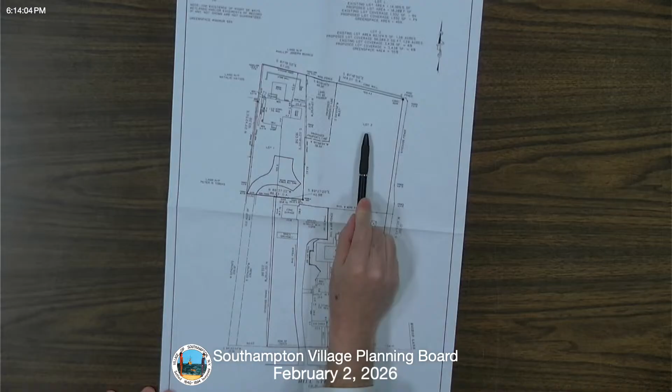Okay, yeah. 2 is on Hill Street, and 1 is at the back. Lot 2 is the larger lot to the east, and Lot 1 is the smaller lot to the west. Can you point to that again? Because we just finally got it. Sure. Lot 2 is this larger lot, actually comes all the way down here. Lot 1 is this small lot up here, it has a right-of-way over Lot 2. But this is the smaller lot, which will result in a more conforming lot once the shaded area here is transferred through this lot line modification from Lot 2 to Lot 1. Got it.

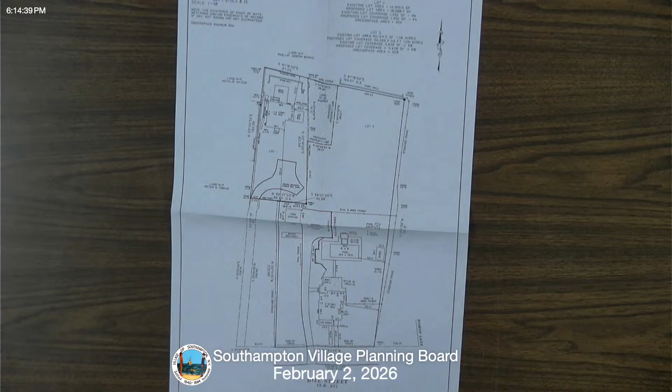And you don't need any variances. No, we are increasing conformity, so I don't think we would need variances. Alex, Lisa, any comments on this? Are you able to tell from the survey the approximate depth of that lot number 2? It's a little bit hard to read on my copy. The depth of Lot 2? Yeah. Do you mean the length of it, the distance from the street? The depth from Hill Street to the rear, the deepest part of the property line.

So the lot is 380 feet from Hill Street. And then is it Lot 2 or Lot 1 you're curious about? I think it's labeled as Lot 2. Okay, so the depth of this from Hill Street to the rear line is a total of 380 linear feet. Okay, understood. I think that there was a question about the zoning ordinance. The R40 district extends 400 feet from Hill Street at this location. So we're sure both of these are in the R20? These are in the R20. Sorry, R40 on Hill Street.

This is the confusion I have on this, because last time we looked at this, I thought this was split between R20 and R40, and that caused some of the problems. We understood it to be in the R20. If it's the R40, it doesn't actually change the calculus. One becomes more conforming, and one is still conforming as a result. Yeah, I believe all of the properties fronting on Hill Street are R40. I'll confirm that. It'd be great just to correct that for the record. I'll correct that, but again, it doesn't change the analysis. The resulting lots would be, one would be more conforming, and one would maintain its conformity.

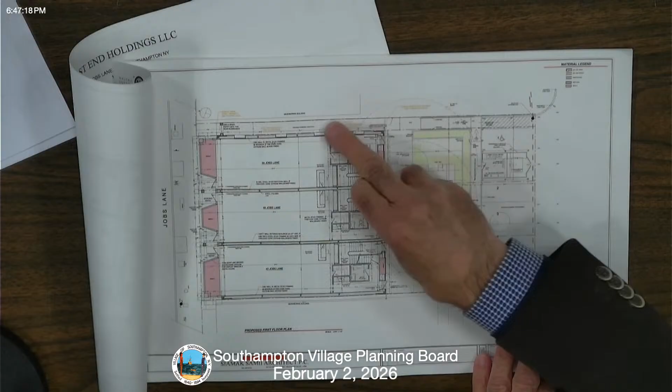Okay, good. So right there is the handicap parking, and the offloading of the handicap right there, 5 feet. That's on the same line as the ramp, which is right where my finger is. That's the ramp. It travels downwards towards the elevation of the plaza, and then you enter the plaza elevation and the walkway on the side all the way to Jobs Lane. And from this plaza, you have access both to the retail stores on the ground floor and separate entrances for the offices upstairs.

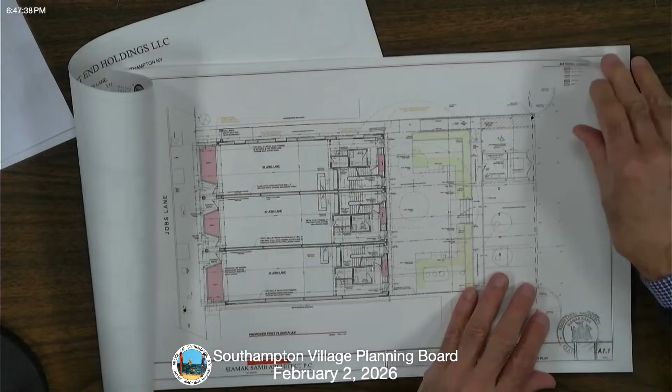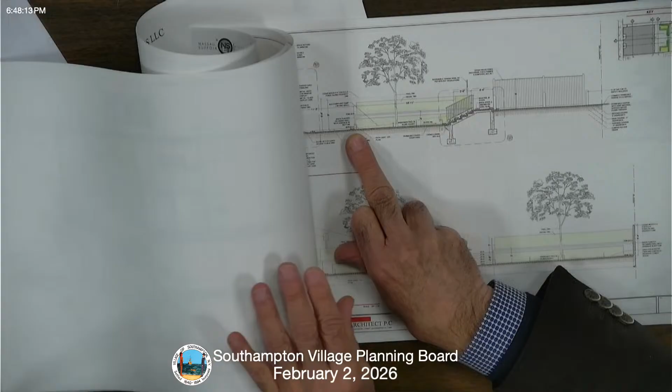So I'm looking at A3.3. And I can see the dotted line there that I'm assuming is that handicap ramp. But where the handicap ramp meets the plaza, west of the ramp, there would have to be a rail on that ramp, correct? There is a wall actually, yes. It's a high wall. Do I see that? Here's the ramp. There's a planter there. That's a brick retaining wall with planter, drainage in the bottom. Exactly. Now I understand.

So this is the wall, little ramp right here. That's why it's confusing with stairs. Is it a ramp? So here are the stairs, here's the ramp, brick planter right there, and then you've got the stairs here. Oh, okay. So the part that's confusing to me is I come down the ramp, and I'm moving to the left of that page, and then I see the grade or the bricks slope up for eased access to building, right? Just where's the building grade, the floor there?

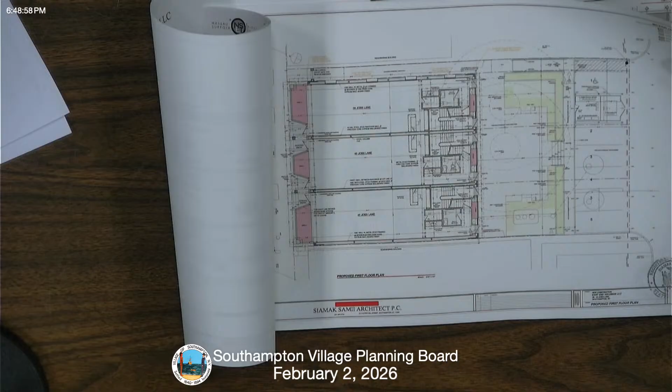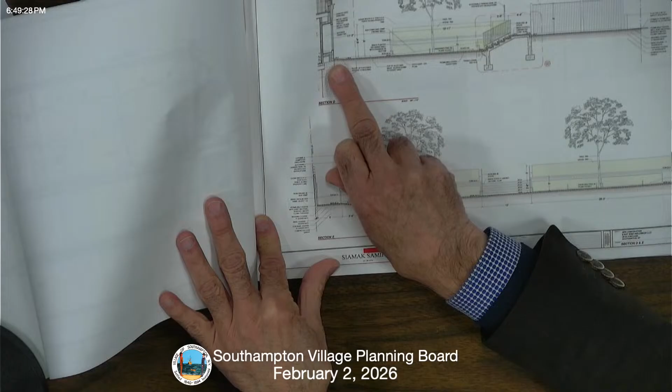Can you go to A3.3? Yeah, right there. Okay. So you see in section D, right there, you'll see a little 20.3 in the corner. So what is happening behind that wall there, to the left of 20.3? That structure right there is what I can't figure out. I can't really read that.

If you look at the rear of the building, on elevation on page A2.1, this is the rear elevation right here. So we have a series of doorways and a series of three display areas. That section you said you can't understand is cut through one of the display areas. But right adjacent to that, you have a pair of doors. One is for the retail, the other one is for the office, at the same elevation. So the window between the two doors is for the retail, and those two brick columns are proud of the rear facade? It's a facade treatment, yes.

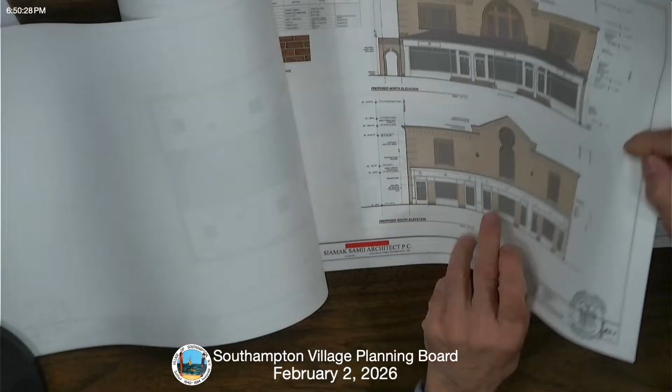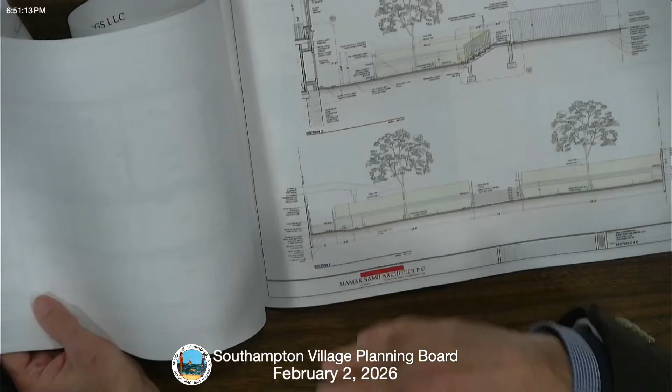So on section D, you're seeing a section through the display area. That's the back, and that's the front. Hang on, let me get there a second. Where you saw the three. I got it now. So it's effectively a flat grade from where your finger is into that doorway, right? Correct. And what I'm looking at is that display. And the doorway is actually set back, which actually gives you less of a pitch going into the door. Now I understand. Yeah, I got you.

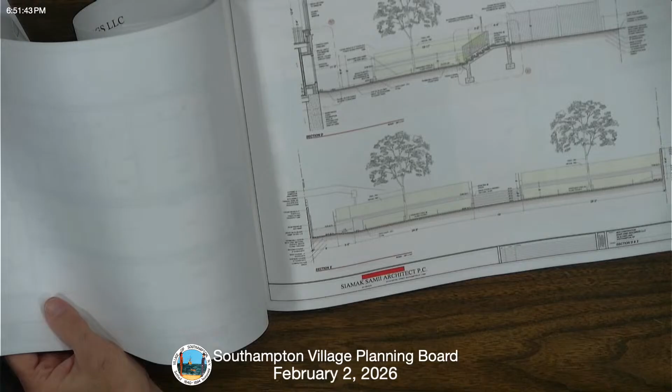Yes, sir. Okay, all right, I understand. Thank you. Yep, no worries. I think we're good. Bruce, yeah, and Hannah's still here, so we still have a quorum. Right, so Alan unfortunately has to leave. We don't have quorum when Alan leaves, because it has to be three in person for quorum purposes. Continue.

Well, I don't even know if you need a resolution, just telling her to refer it to Lisa's engineer, that's all. She's saying it's complete enough to review. So what are you looking for tonight from us? Have Lisa's engineer at H2M give us their comments. I have to figure out the SEQR issue, kick it over for a month. We'll come to a resolution on that, and then I'm gonna ask you to set a public hearing. So, we'll kick it to March 2nd, right? Unless you want to establish a public hearing, but we should probably take care of those issues first.

What do you think? Yeah, I mean, typically when the board would schedule a public hearing, they'd classify it at the same time. Perfect. So before you go, motion to carry this over to our March 2nd meeting. Second. All in favor? Aye. But you're happy with Lisa's people looking at the engineering? Yeah. We'll do the detailed engineering process. Perfect. All right, thanks, Alan.

I'm sorry, I have a compromised spouse. Well, thank you. We can still continue to talk about this without a quorum, can't we, or no? We've already adjourned it, so it'd probably be good to continue at the next meeting. Is there any other questions? Good night, Alan.

I mean, you're not taking any actions, though, so if there are other questions, why don't you just shoot away? We're happy to answer any questions. I think we're good. Okay. So Lisa, your engineers will work on this, and you'll address the SEQR thing. Between the three or four of us we'll figure it out. We'll see you again on the 2nd. Yeah, I'm not trying to be pedantic about it, but if something can fit into a Type 2, I'd prefer that. Okay, thank you. All right, we're done.